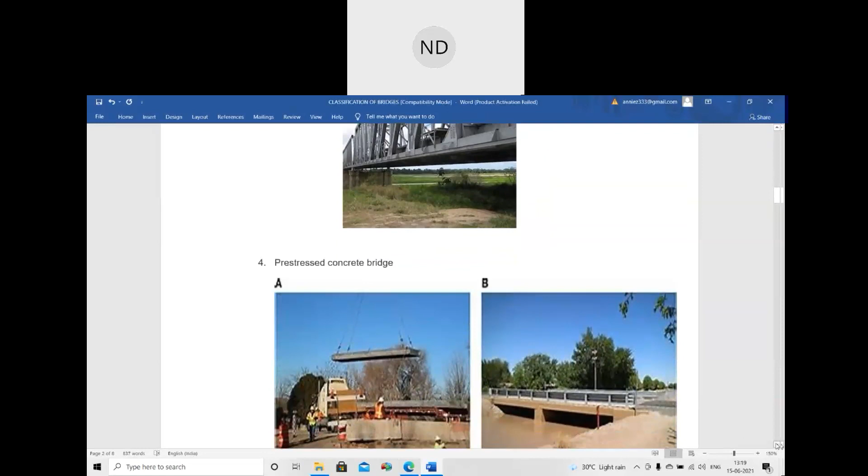Next is this also based on the material, pre-stressed concrete bridge. We know that pre-stressed concrete bridge is what - I have talked with you about the pre-stress before also. Pre-stressed concrete, right? So those are precast and pre-stressed.

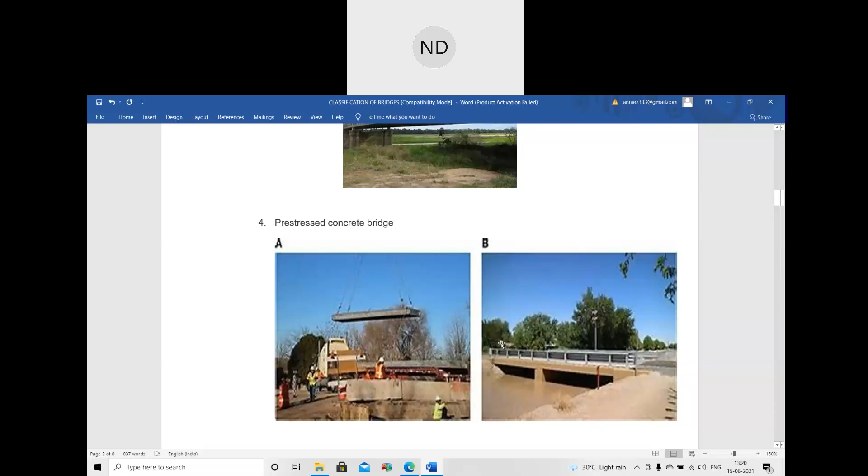So you see here, this is a precast slab which is placed above the bridge, and then the different slabs or the different decks are used, and then they are placed together and joined together. These are precast, and then they are used, and then this is formed. A bridge is formed when they are joined together. So this is your pre-stressed concrete bridge.

Now another one is your composite bridge. Composite bridge, they can be made up of different materials, right? Like concrete is used here, some steels are used here. So these are your composite bridges depending upon the material.

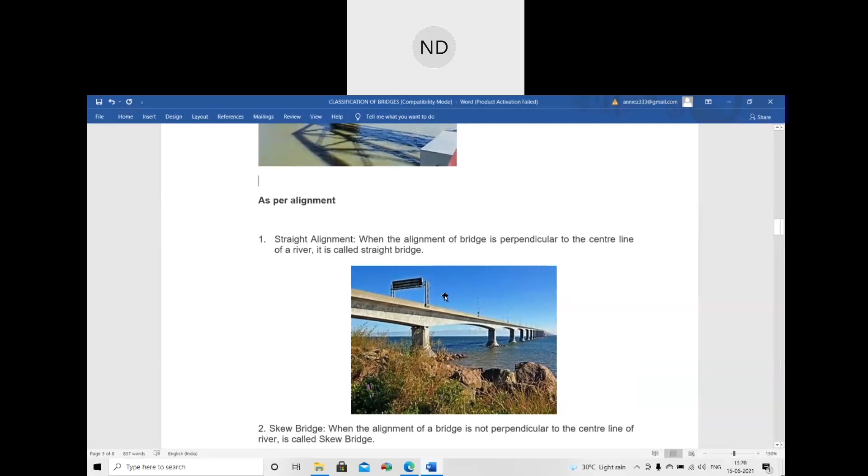Now next is as per the alignment. So as per your alignment, you have a straight alignment bridge, Skew Bridge, and again another one is there. But before that, as per the alignment, we have the straight alignment. You see here the bridge, this is a straight aligned bridge. So it is known as your straight alignment bridge. As the name suggests, as per the alignment criteria, it is a straight aligned bridge - when the alignment of a bridge is perpendicular to the central line of a river.

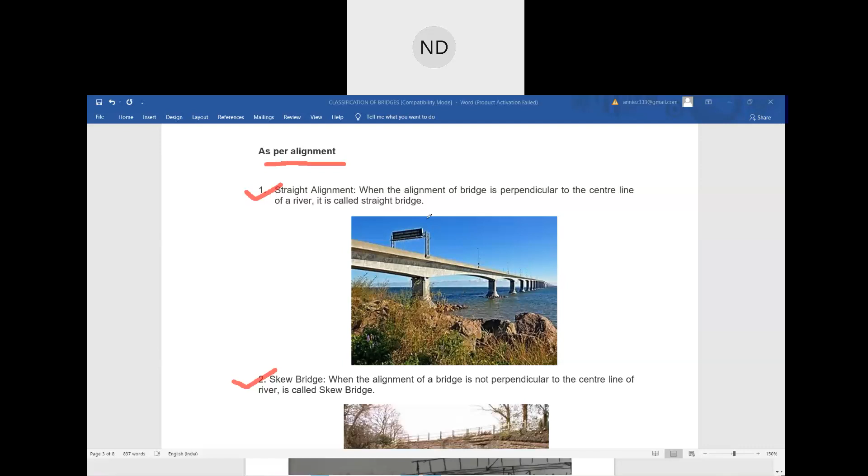This is the bridge, this is perpendicular, this is the perpendicular straight bridge over the river. So this is a straight line. Now skew bridge, what is a skew bridge?

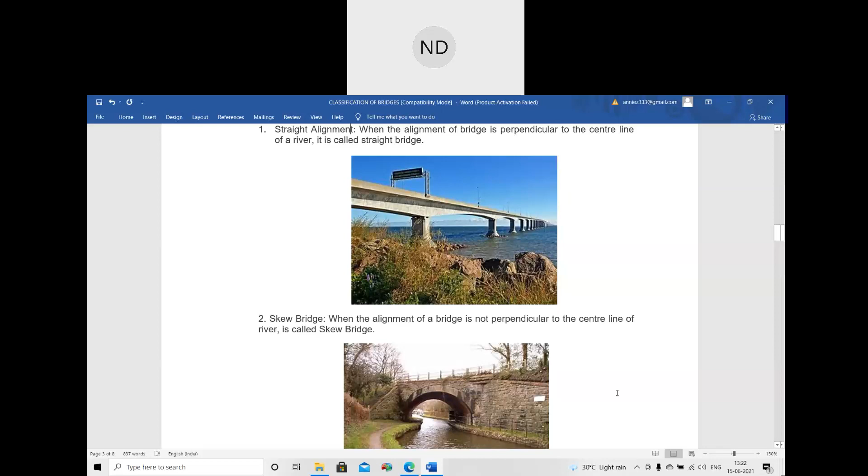This one is a skew bridge, when the alignment of a bridge is not perpendicular to the center line of the river. Your straight aligned bridge was perpendicular to the central line of the river or any stream. But here, this is not perpendicular to the river or stream flowing below the bridge, so it is inclined - not straight perpendicular, but inclined from here to here. So this is known as your skew bridge, according to the alignment.

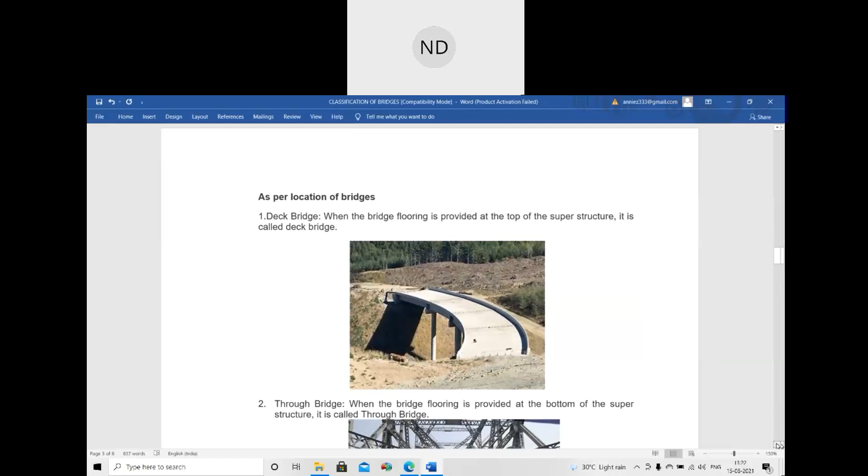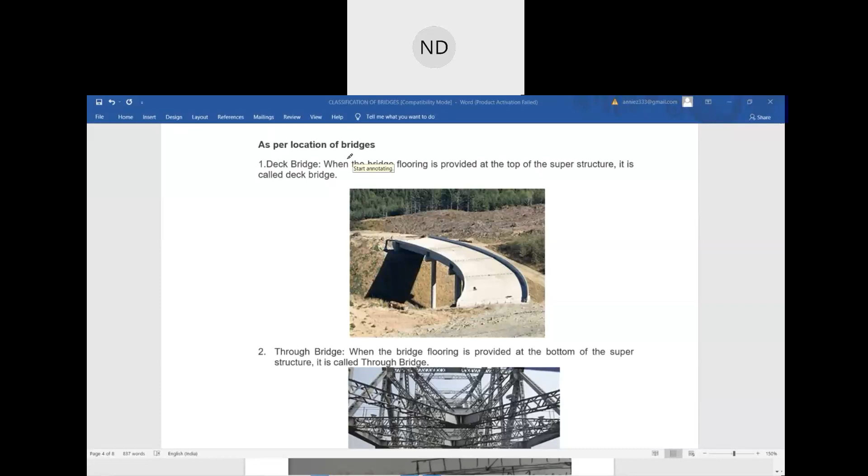Next is classification as per location of the bridge. The first one is your deck bridge. When the bridge flooring is provided at the top of the superstructure, it is called the deck bridge. This is the superstructure above the ground, and the flooring is above the superstructure, at the topmost. So it is known as your deck bridge - the flooring is above the superstructure.

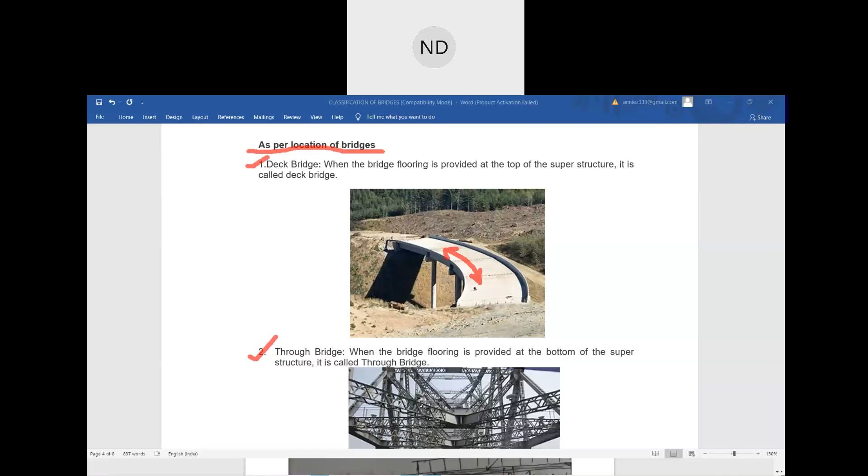Another one is your through bridge. When the bridge flooring is provided at the bottom of the superstructure - you see here, this is your superstructure, and your flooring is below the superstructure, right? So this is your through bridge.

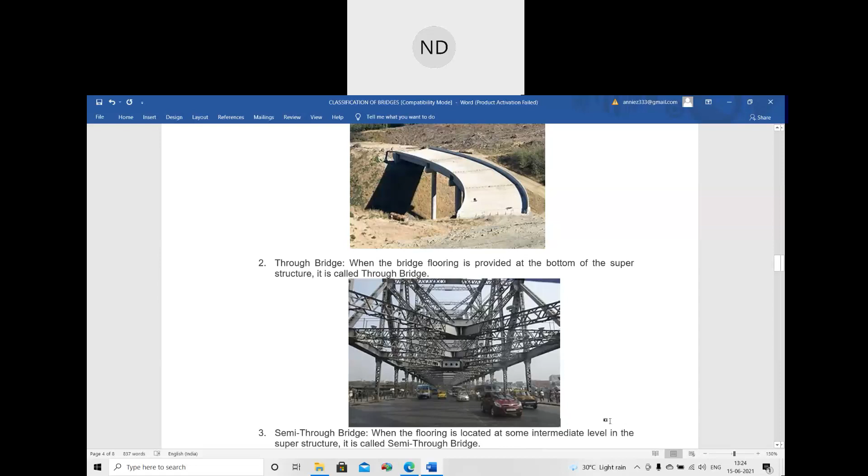Now another one is your semi-through bridge. You can see in the picture I have given, the flooring of your bridge is above the superstructure and also below the superstructure. So this is known as your semi-through bridge.

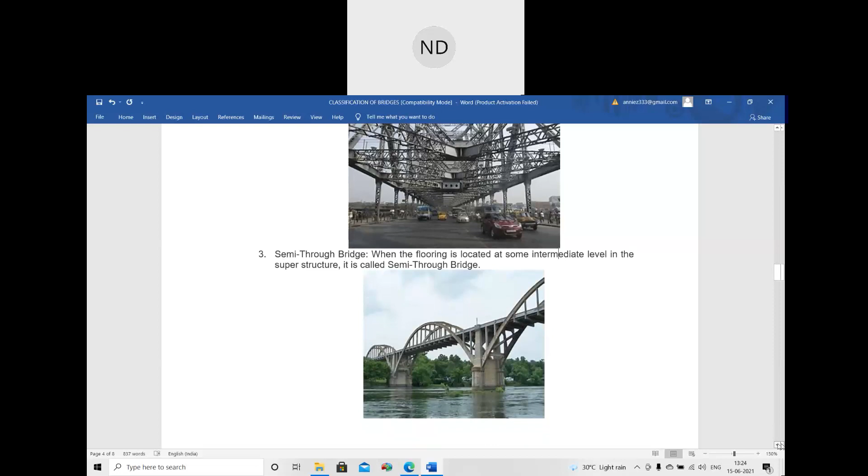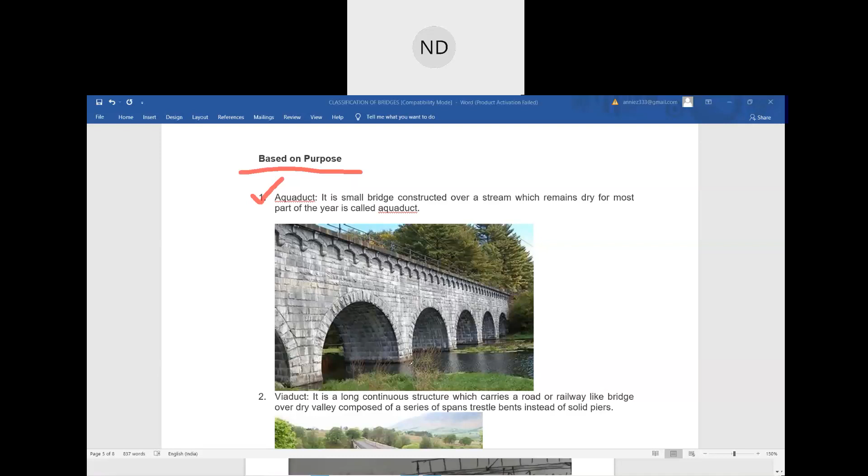Now next classification is based on your purpose. The first bridge is your aqueduct, which is a small bridge constructed over a stream that remains dry for most part of the year. There is not much running water here. Based on the purpose, this kind of bridge is known as your aqueduct bridge.

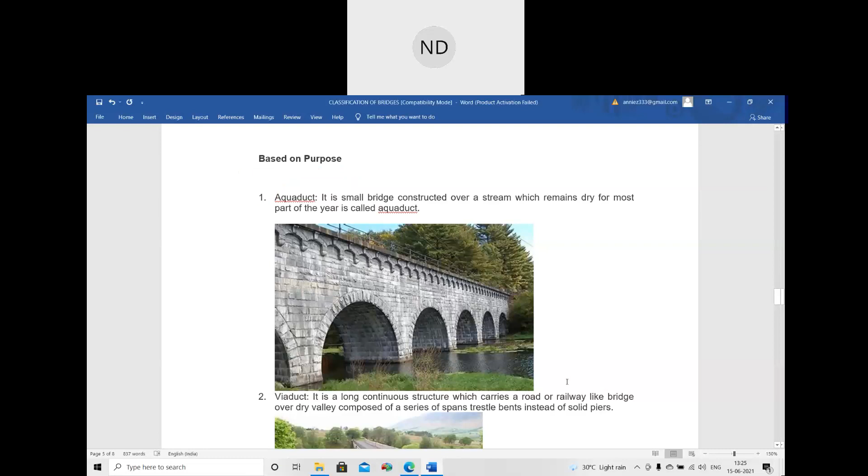This is a viaduct. A viaduct is a continuous structure which carries a road or railway bridge over a dry valley, composed of a series of spans, trestle bents, instead of solid piers. These bents are used, and above that we have the road or railway. Aqueducts are built above streams or ponds, but the viaduct is on dry land - known as your viaduct.

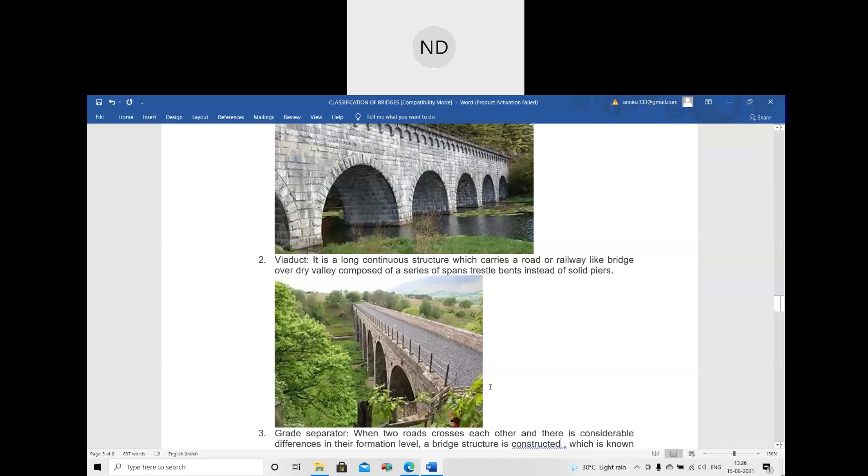Now another type based on purpose is the grade separator. When two roads, or a road and railway line, cross each other at different levels - one at the top, one at the bottom - they have a considerable level difference. To separate these two crossing paths, we construct a bridge over that. This is known as your grade separator bridge.

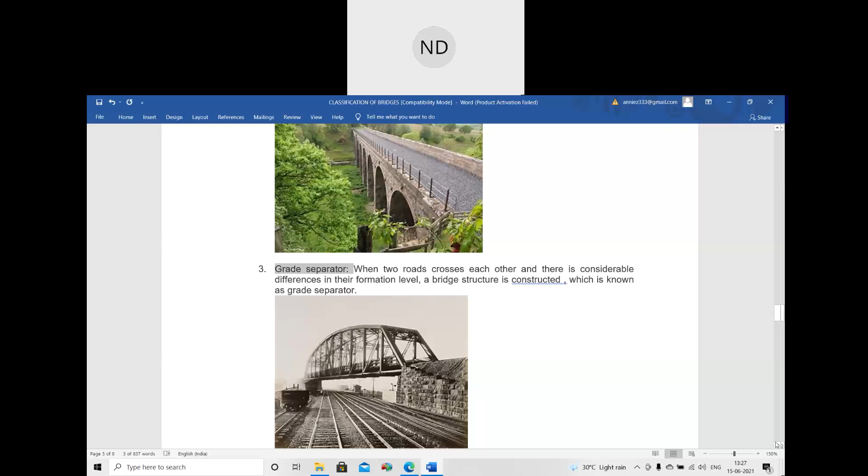Now the next one based on purpose is a highway bridge. It is constructed on a roadway for the movement of vehicles - this bridge is constructed above the highway.

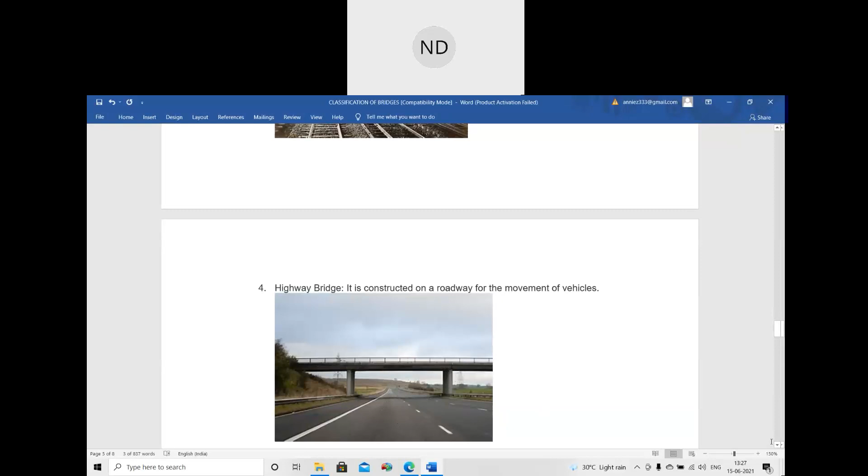So it is known as a highway bridge. Now the rail, similar to that, is a railway bridge. It is constructed for the railway.

Footbridge. A footbridge is a bridge exclusively used for carrying pedestrians. You know this, what is a railway bridge, what is a footbridge.

When you have a roadway passing and the cars are passing through, we need the pedestrians to pass through too. The people can walk and cross from here to here, so to avoid accidents or traffic, this footbridge is constructed across the road, so that the pedestrians can pass. So these are your footbridges.

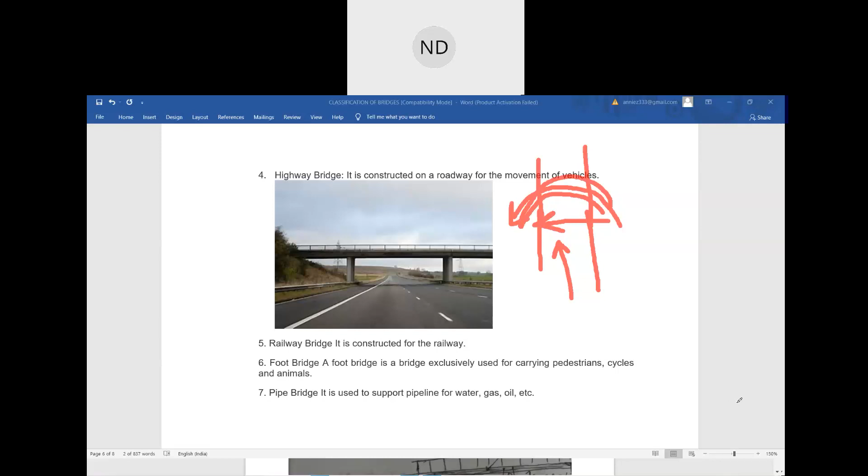Railway bridge also, you know, is for railway passage. Then we have pipe bridge. It is used to support pipelines for water, gas, oil, etc. Okay, pipe bridges.

Now next is according to the superstructure. So according to the type of superstructure, there is again a different classification of bridges. The classification is: slab bridge, girder bridge, truss bridge, suspension bridge, arch bridge.

Slab bridge: when the span of a bridge is 3 to 6 meters, slab bridge is used. It is also called culvert. Shall I show you the pictures? So slab bridges, when your bridge span is 3 to 6 meters, we use the slab bridge, culvert, you can say. Girder bridge: when the span of a bridge is more than 3 to 6 meters, flooring is supported on RCC or steel.

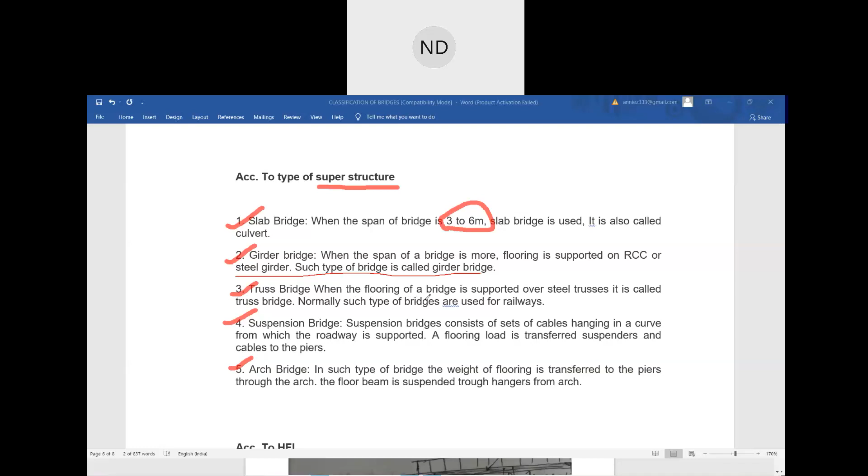Such type of bridge is called girder bridge. Now truss bridge: when the flooring of a bridge is supported over steel trusses, it is called truss bridge. Truss bridge you have seen, right? Truss bridges can be of different kinds like this.

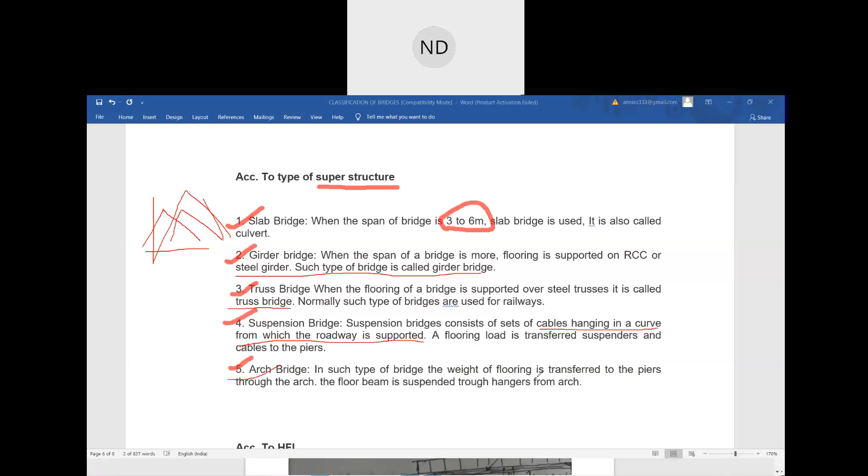Suspension bridge consists of a set of cables hanging in a curve from which the roadway is supported. The flooring load is transferred through suspenders and cables to the piers. Now, what is an arch bridge? In such type of bridge, the weight of the flooring is transferred to the piers through the arch.

These are based on your superstructure. Let me show you so that you have a clear idea about that.

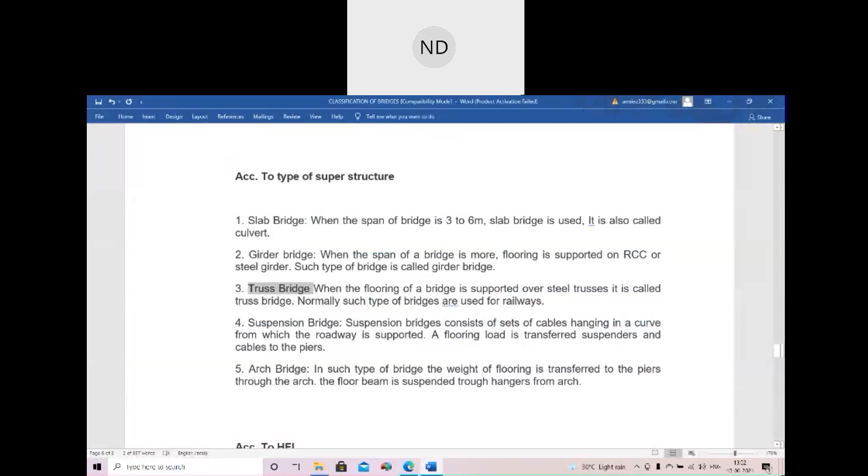Now, if I'll show you the suspension bridge, hello, hello.

So you have seen these were your truss bridges. Oh, I was about to show you the suspension bridge, right? I have shown you the truss bridge. Now let us check the suspension bridge.

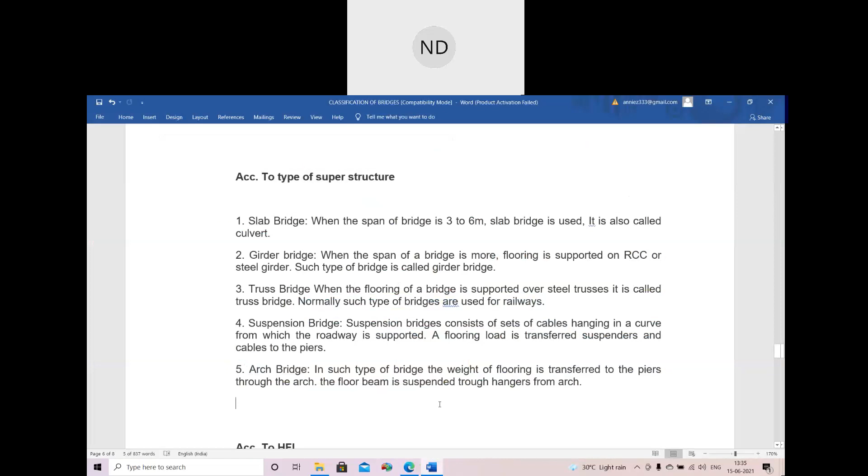So that was your classification based on the type of superstructure. Now, based according to HFL, we have what? The submersible bridge or causeway. A road causeway is a pucca dip which allows floods to pass over it. It may or may not have openings or vents for low water to flow.

Yes. Side up a little. One minute. Give me a second.

So these are your submersible bridge and non-submersible bridge. In this type of bridge, formation level is kept above the highest flood level so that maximum flood does not affect the traffic.

So that means we have classification based on the highest flood level. First one is submersible, another one is non-submersible. Suppose this is a river or any kind of water body. You have constructed your bridge over here, and your HFL is here.

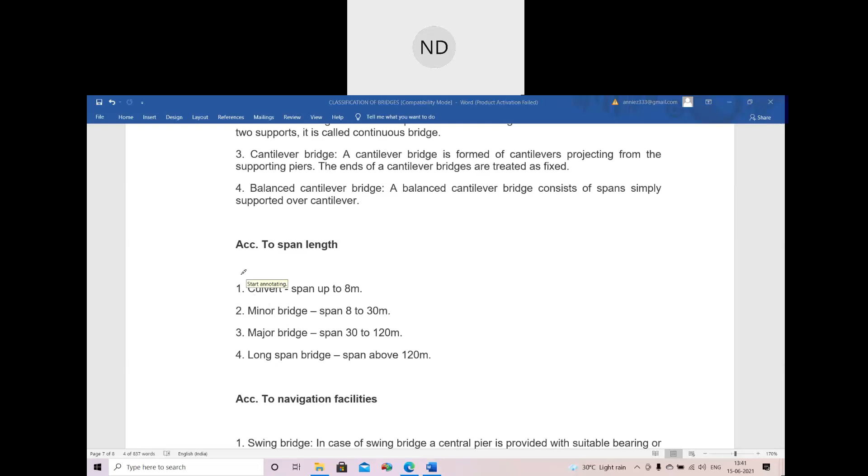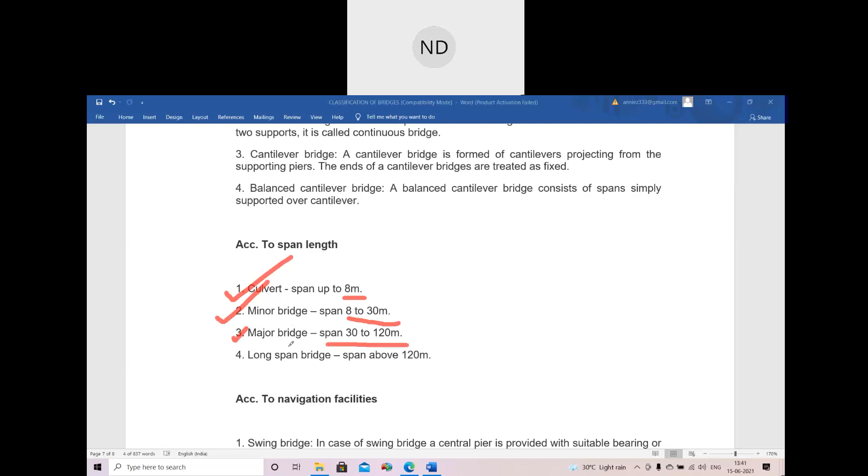According to the length of the bridge, these are the classifications: culvert bridge when span is up to 8 meter, minor bridge when span is between 8 to 30 meter, major bridge when span is from 30 meter to 120 meter, long span bridge above span of 120 meter.

So when do we call a bridge a long span bridge, major bridge, minor bridge, and culvert bridge? When you have a span of up to 8 meter, that bridge is your culvert bridge, between 8 to 30 it is your minor bridge, above 30 to 120 it is your major bridge, and longer bridges above 120 meter are long span bridges.

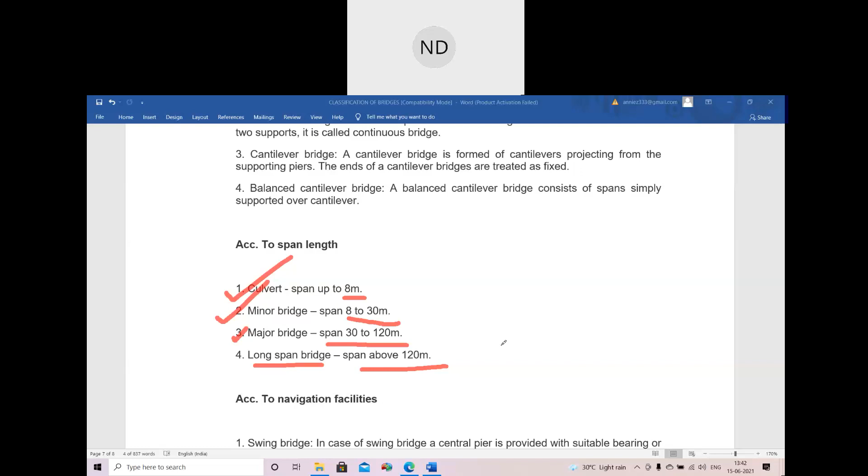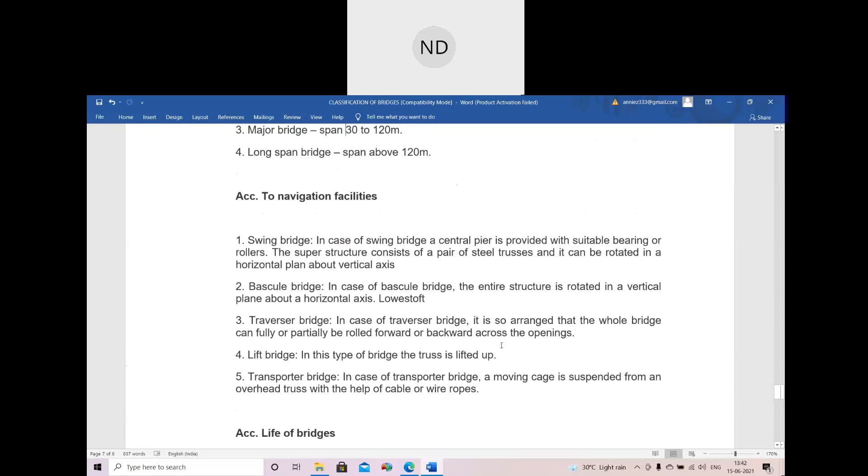So next, according to the navigation facilities, we have swing bridge, bascule bridge, traverser bridge, lift bridge, transporter bridge. What is your swing bridge? In case of swing bridge, a central pier is provided with suitable bearing or rollers. The superstructure consists of a pair of steel trusses and it can be rotated in a horizontal plane about the vertical axis. Let us see what is swing bridge.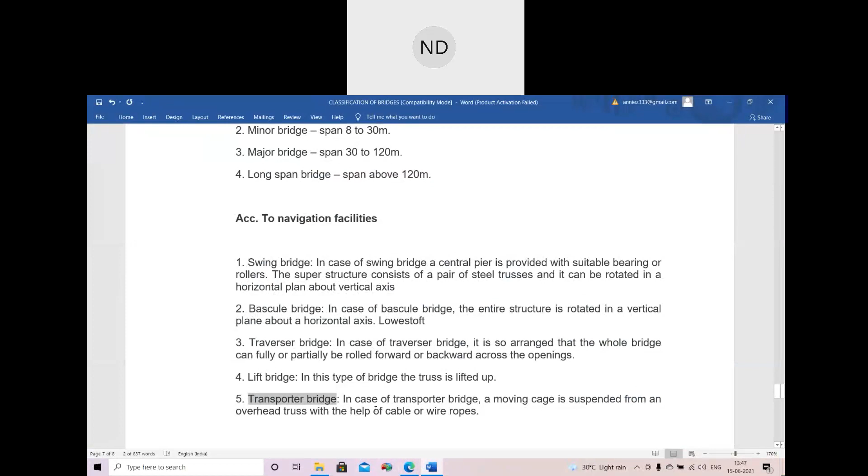Now, according to the life of bridges, we have temporary bridge and permanent bridge. These two bridges are there. Examples of temporary bridges are pontoon bridge, Kumbh Mela bridges.

Right, they say like that. These are temporary bridges. Permanent bridges are completely permanent, but temporary bridges are constructed temporarily for some different purposes.